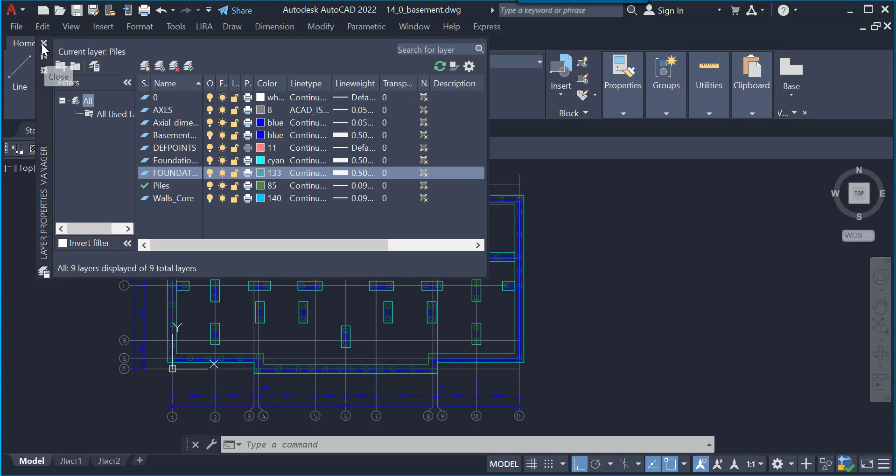Check that the layer AXES is indicated in capital letters. Also check the correct layer name, foundation_slab_openings. Close the dialog box. Now we proceed to the second stage of inputting the properties of objects using the floor plan import components built into AutoCAD.

Click on the built-in panel LIRA. Select Create Layer, then Walls. The Walls layer is automatically set as the current layer. Select the Polyline command and move the cursor to the doorway in the stiffness core located along the D-axis. Move the cursor to the middle of the left edge of the opening and start building the polyline from here to the left. Enter 575 mm.

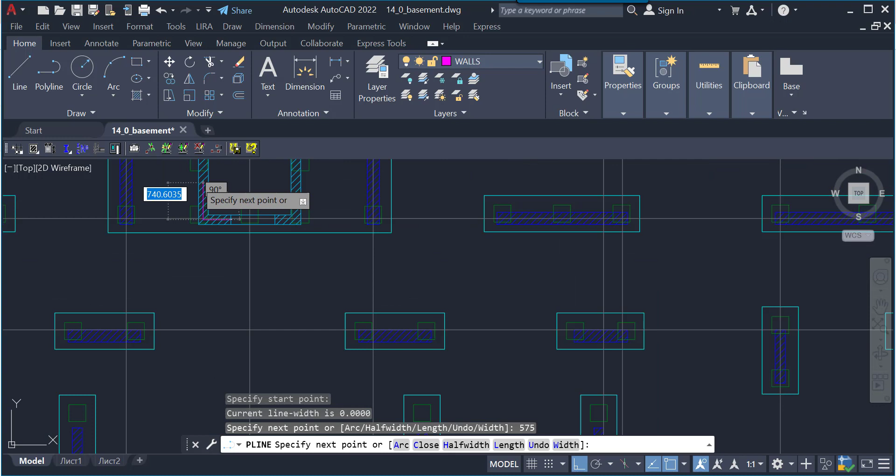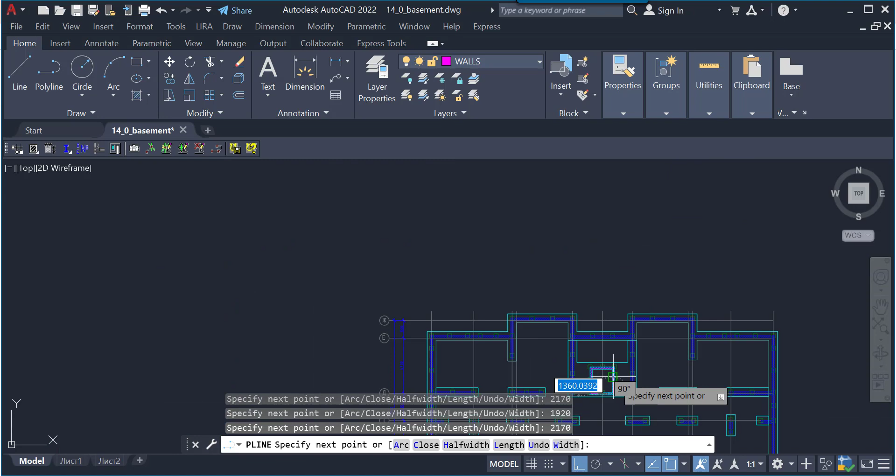Click Enter. Then change the direction up and enter 2170 mm. Click Enter. Change the direction to the right and enter 1920 mm. Click Enter. And change the direction down, enter 2170 mm. Click Enter and close the polyline by pressing Enter. Select the newly created polyline and click on the point at the beginning of the doorway and move it to the corner of the wall.

Click on the built-in panel LIRA. Select Layer Properties and Wall or Slab Thickness. Press Enter to confirm that the following layers of walls will be modified. Enter a core wall thickness of 200 mm and press Enter. The following layers will be modified. The postfix WALLS(H-200) will appear.

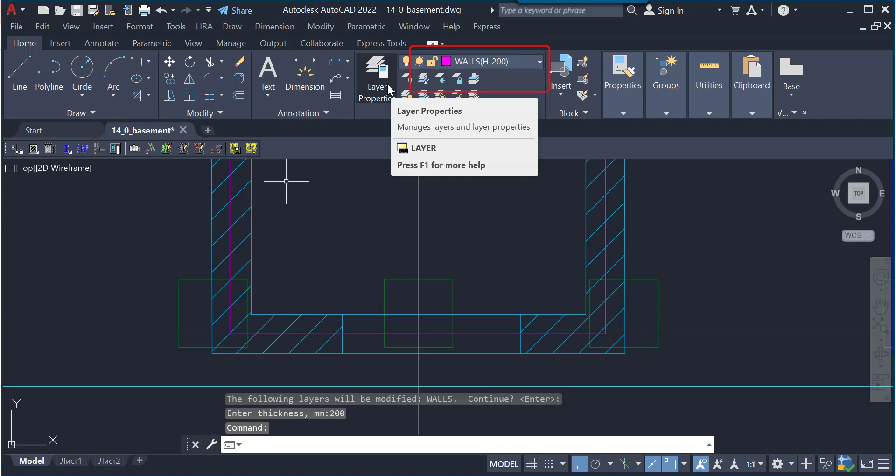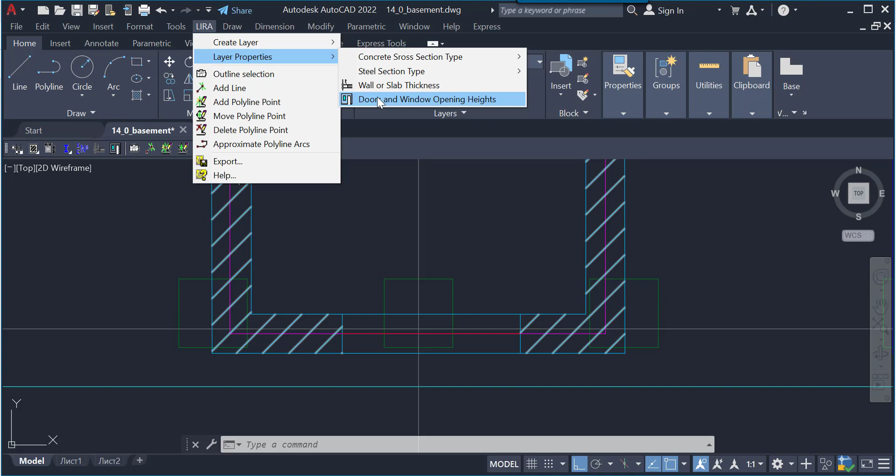Click on the built-in LIRA panel, select Create Layer and Door Openings. Select the Line command and create a line according to the dimensions of the opening. Click on the built-in panel LIRA, select Layer Properties and Door and Window Opening Heights. Select the newly created line and press Enter. Press Enter again to confirm the changes in the following layers.

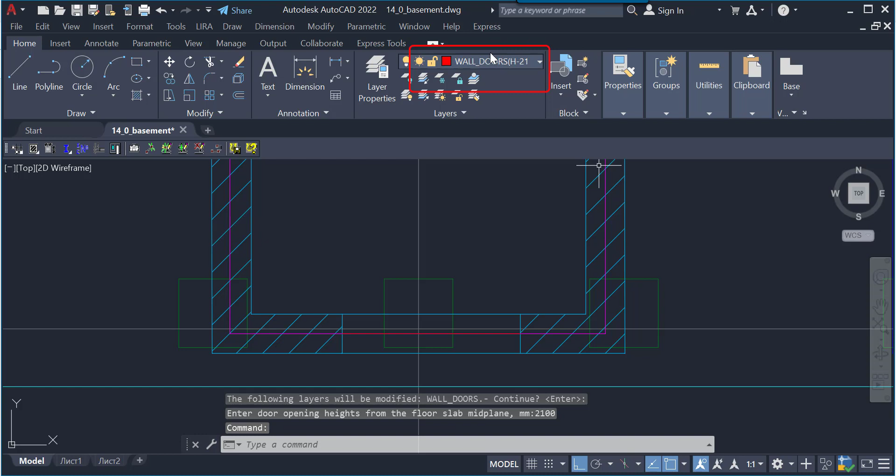Enter door opening height from the floor slab midplane 2100 mm and click Enter. The name H2100 will appear. Select the polyline command and select the piles layer from the drop-down list of layers. Check that these buttons and endpoint are switched on. We proceed to the third stage of entering the properties of objects along the contour.

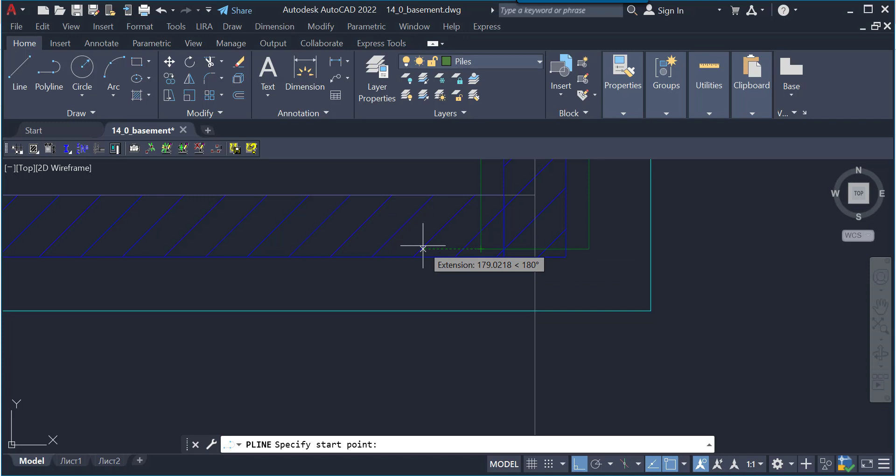Bind the cursor to the pile located at the intersection of axes B and 11. Enter the offset value of 1150 mm to the left and press Enter. Change the direction up and specify the value 350 mm. Then 350 mm to the left, 350 mm down. Close the polyline and click Enter.

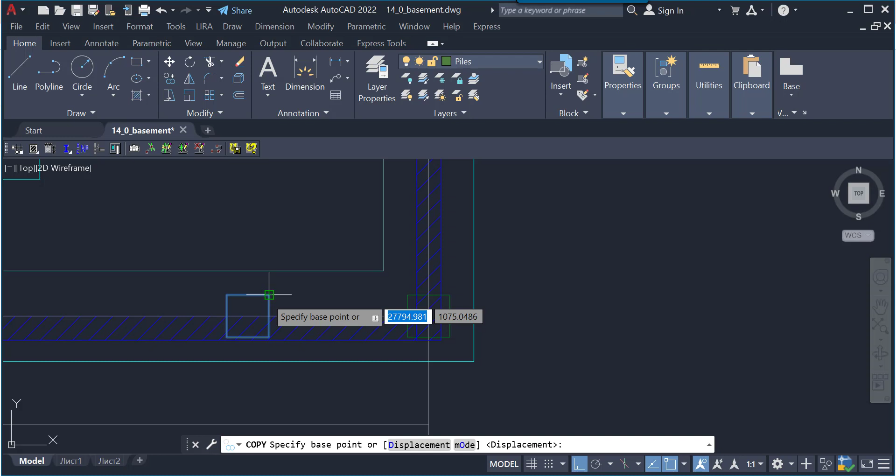Select the newly created pile, select the Copy command and specify the right point of the pile at the snap. Set the offset direction to the left, 1540 mm. Then 2590 mm and 4150 mm and click Escape. Open the Save Drawing dialog box and click Save.

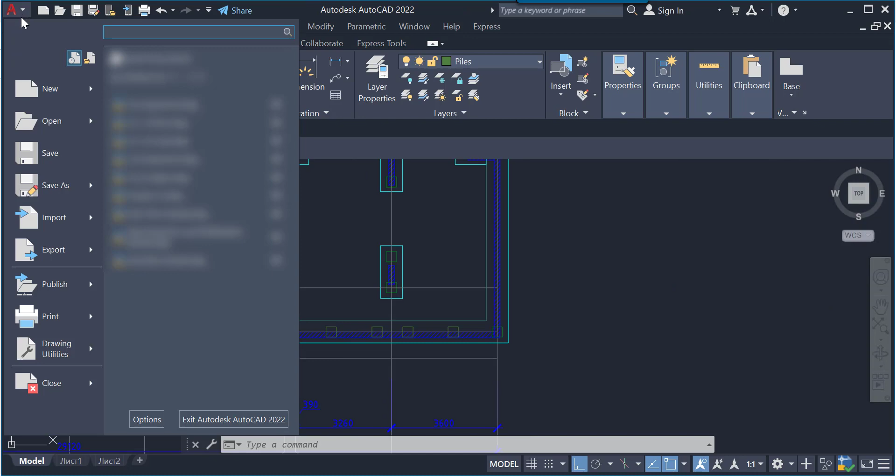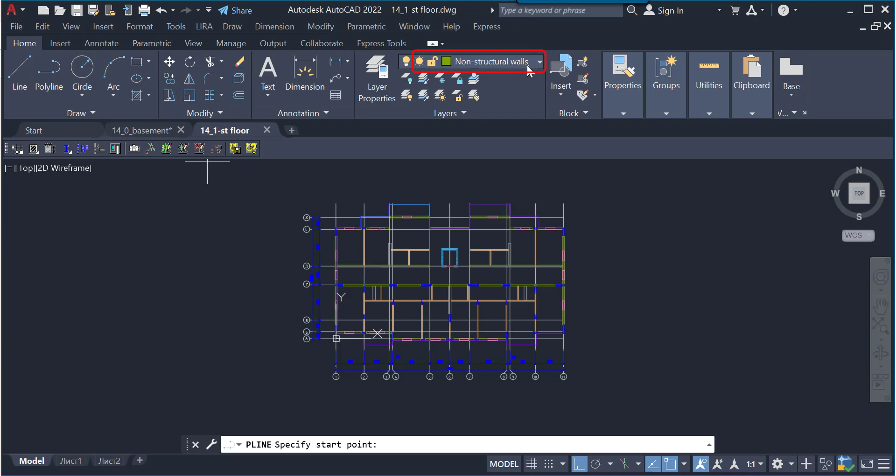Click File, Open. Select Local Disk C, then Users, Public Documents, LIRA-SAPFIR 2022, Manual, Folder In, Folder 14, and File 14 First Floor. Select the polyline command and select Non-Structural Walls 250.

Bind the cursor to the lower left corner of the pylon located at the intersection of the 10B axis and left mouse click. Move the crosshairs to the left and enter value 3230. Press Enter. Change the direction up. Enter 250 mm. Press Enter and enter 3230 to the right. Press Enter. Close the polyline. Select the polyline command again.

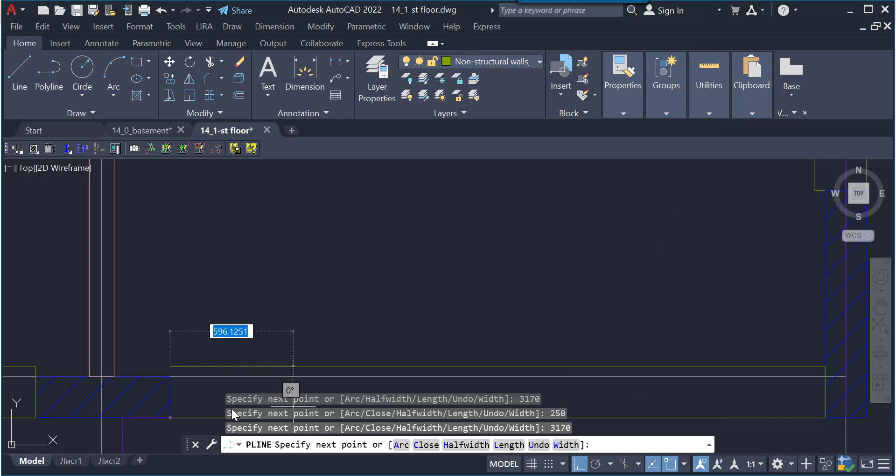Bind the cursor to the lower right point of the pylon located at the intersection of axis 10B and click the left mouse button. Start moving the crosshairs to the right. Enter value 3170 mm. Click Enter. Change the direction up and enter 250 mm. Click Enter. Enter 3170 mm to the left and close the polyline.

Select the command Polyline. Select layer Windows Outline. Bind the cursor to the middle of the bottom edge of the wall along axis B, which starts from axis 8. Click the left mouse button. Move the crosshair to the right. Enter the value 1200 mm. Click Enter. Change the direction up, enter the value 250 mm and click Enter. Change the direction to the left, enter 1200 mm and close the polyline.

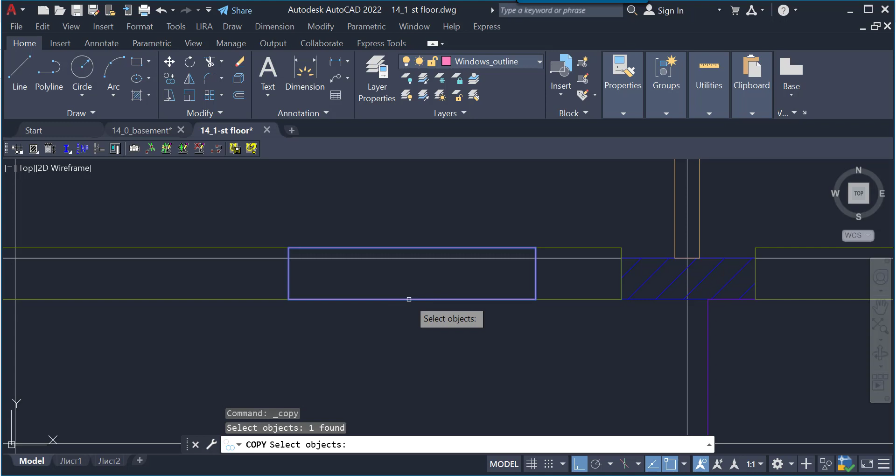Select the Copy command. Specify the middle of the bottom edge of the window opening as a base snap point and indicate the middle of the wall along the B-axis between axis 10, 11 as a second point. Press Escape.

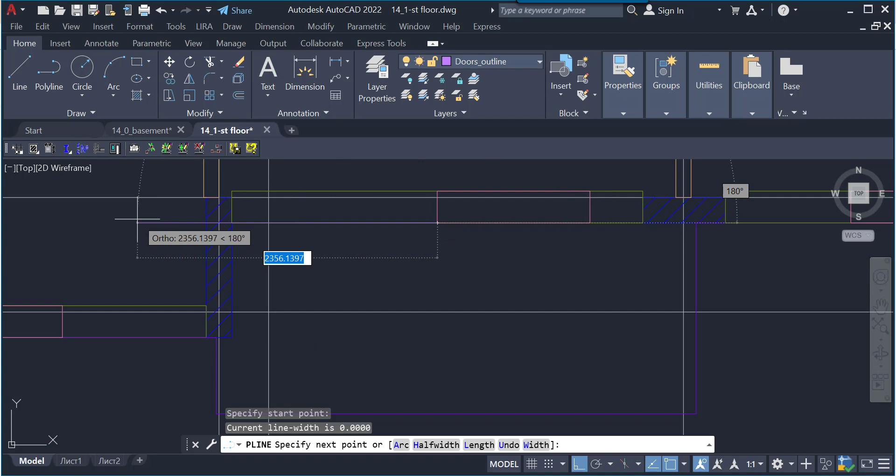Select the Polyline command and select the door's outline layer. Bind the cursor to the lower left corner of the window along the B-axis between axis 9, 10 and click the left mouse button. Start moving the crosshairs to the left. Enter the value 700, press Enter. Change the direction up, enter the value 250, click Enter. Build in the same way to the right 700 mm and close the polyline.

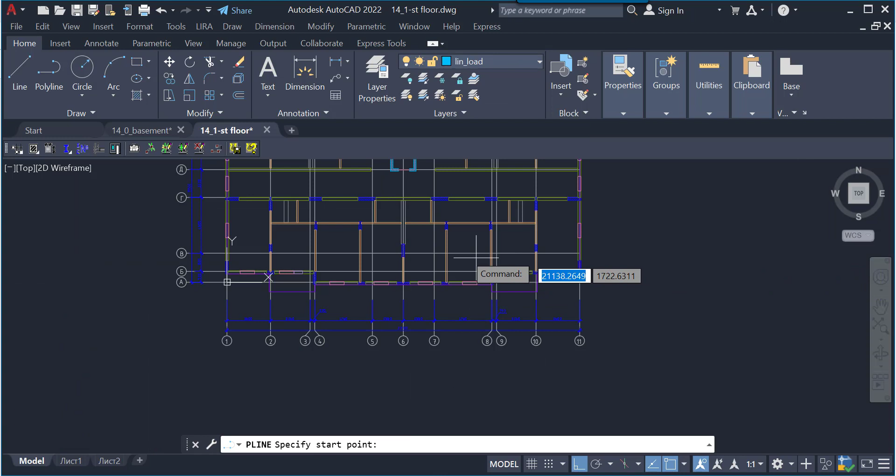Select the command Polyline and the layer Linear Load. Bind to the intersection point of the slab and the pylon near the intersection of the B2 axis and enter the value to the right 60 mm. Click Enter. Indicate the direction down, enter 1440 mm. Click Enter. Change the direction to the right 3650 mm and up 540 mm.

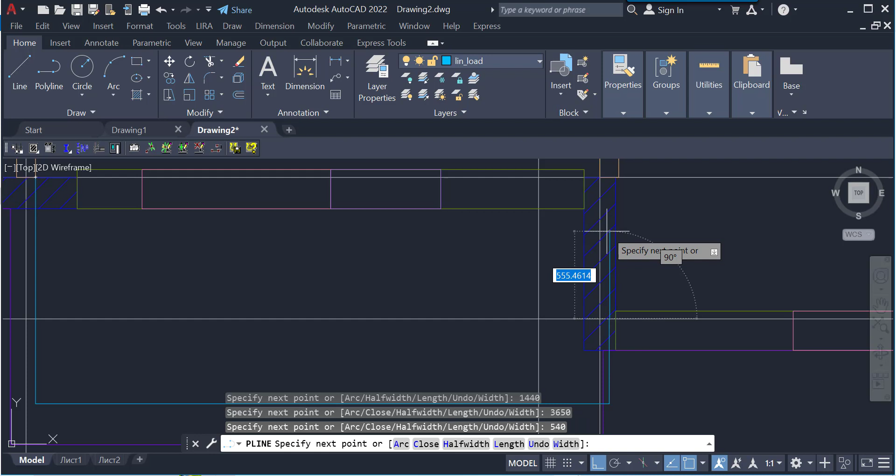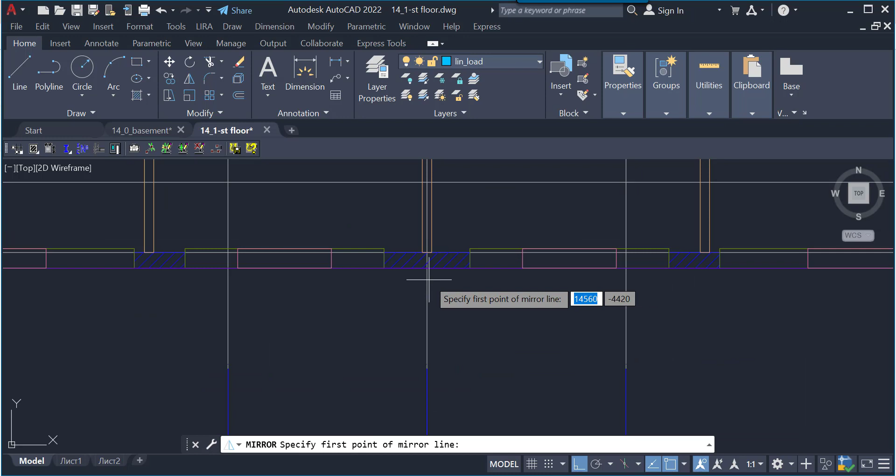Click Enter. Click Tools and open Quick Select. In the Properties, select the polyline object type. In the Properties block, specify the layer. In the Value list, select the layer Linear Load. Click OK. Select the command Mirror and indicate 2 points on axis 6 to set the axis of symmetry. Now the software asks you to erase source objects. Answer no. Click Enter. Click File and save the drawing.

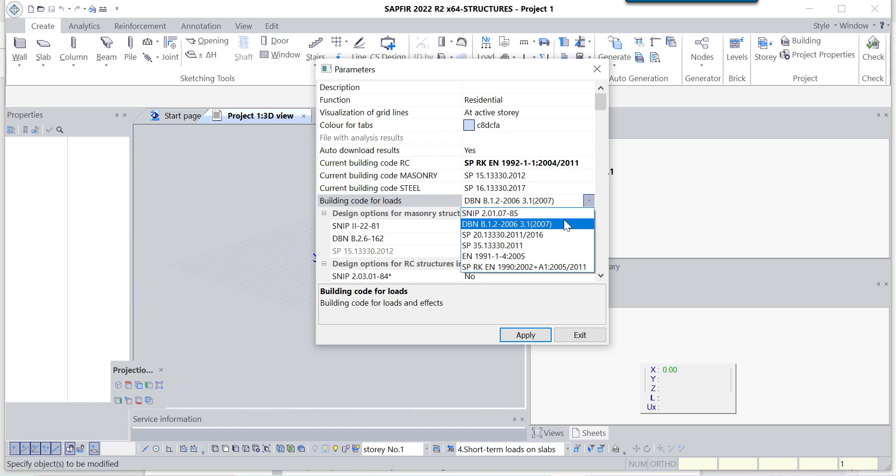Open Sapfir. Click Create Project. Click Project Properties. Change the current building norms to your code. If you can't find the necessary norms, scroll down to Design Options for Reinforced Concrete Structures and find SP RK and click Yes. Then click Apply. Now change the current building code for reinforced concrete and loads in Edit Norm. Click Apply and exit. Open the Import Floor Plans dialog box.

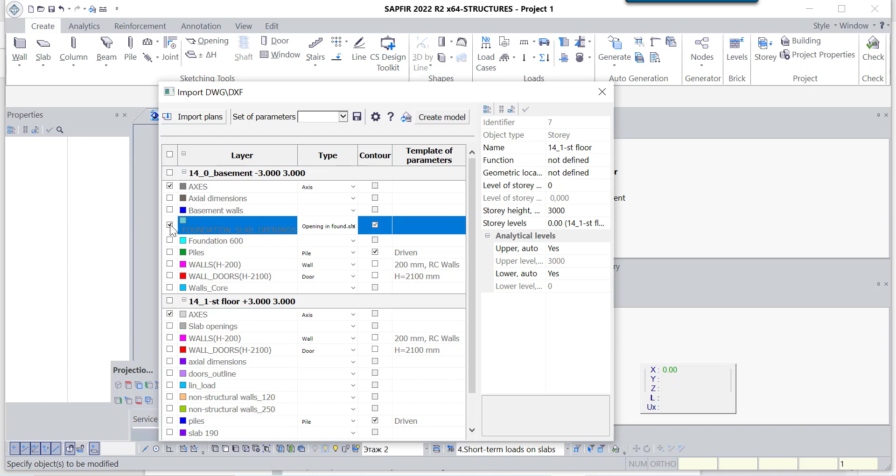Select the basement and first floor files. Open them. Click on the name of the floor 14-0 basement and specify the bottom level of the floor minus 3000 mm. Apply the properties or click OK. The level of the bottom of the floor should be 0. Press Enter. Check the boxes next to the layers Axes, Foundation Slab Openings, Walls H200 and Wall Doors H2100. Click the Piles layer.

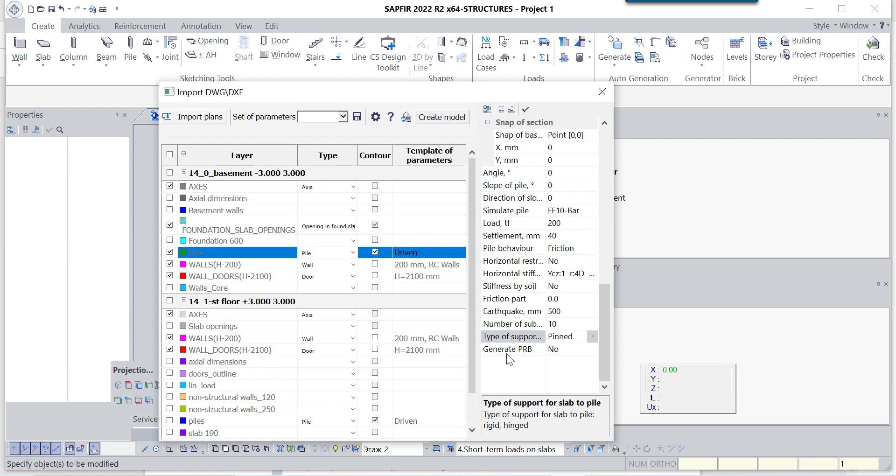Select the type Pile. In the Properties, find Type of Support and click Pinned. Click Enter. Select layer Basement Walls and select type Wall. Select the layer Foundation 600, select the type Foundation Slab and click Contour. In the Properties, select Restraints. Click on 3 dots and select XY. Click OK. Select the layer Doors Outline. Select the type Door. Click Contour.

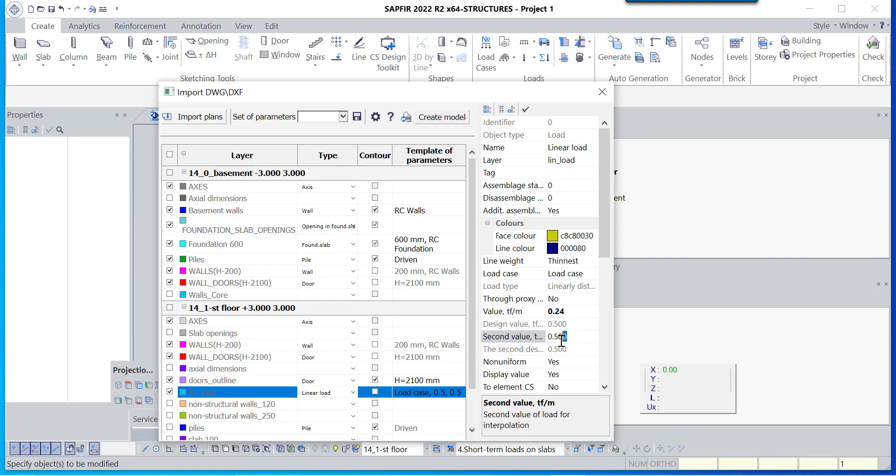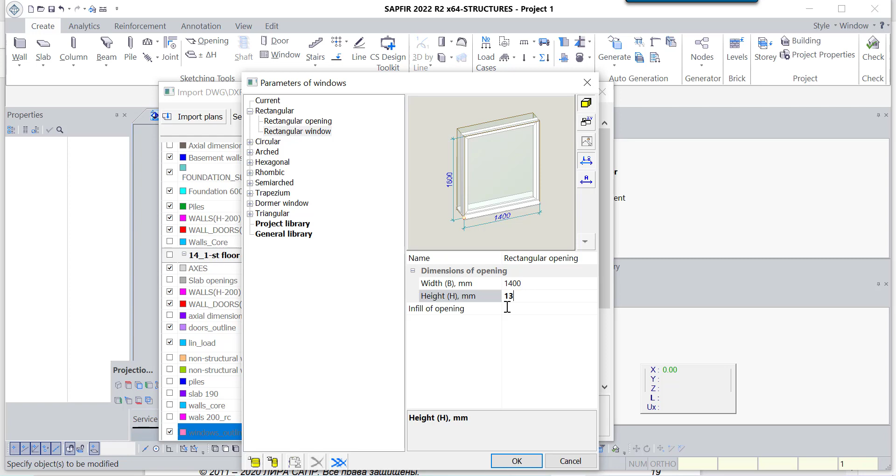Select the layer Line Load. Select the type Linear Load. In the parameters, find value and enter 0.24. The second value is the same. Click Enter. Select the layer Windows Outline. Select the type Window. In the parameters, find parameters of opening and click 3 dots. Change the height. Enter 1300 mm. Click OK and Enter. Select Slab Openings. Select the type Opening in Slab.

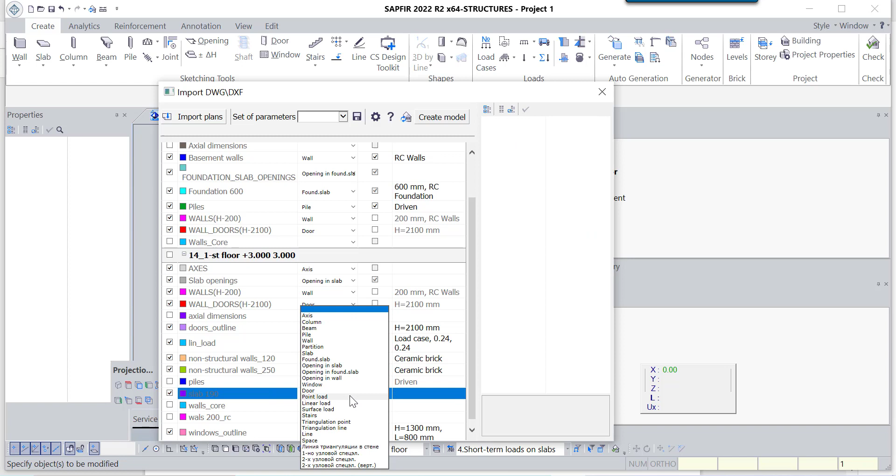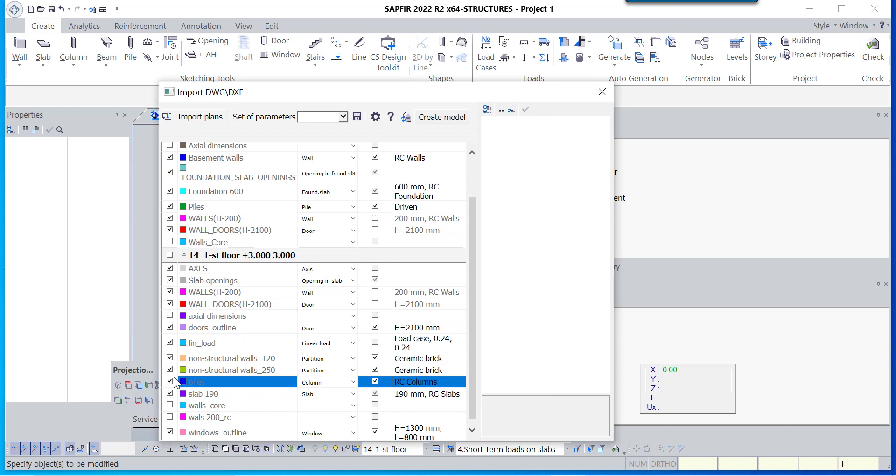Press Shift and hold the button, and click layers Non-Structural Walls 120 and Non-Structural Walls 250. Select the type Partition. Select the layer Slab 190. Select the type Slab. In the Properties, find Thickness and change to 190. Scroll down and enter Dead Load 0.2 and Short Term Load 0.1. Click Enter. Select the layer Piles and select the type Column. Select the layer Walls 200 Reinforced Concrete. Select the type Wall. Click Create Model.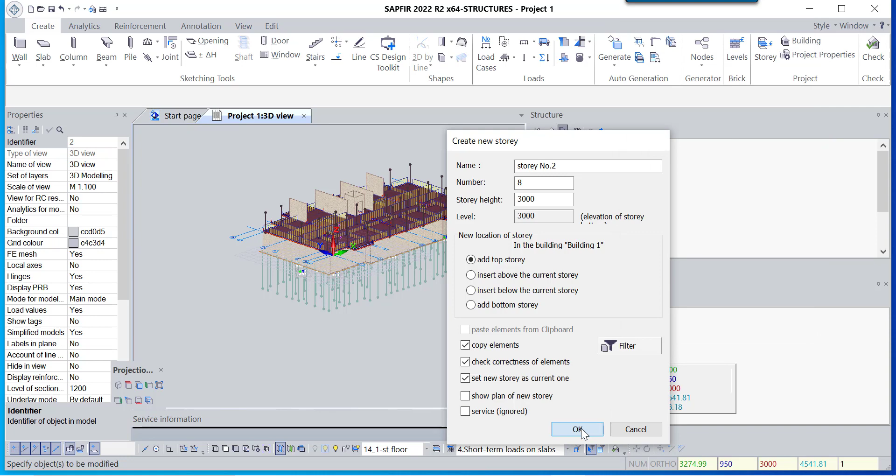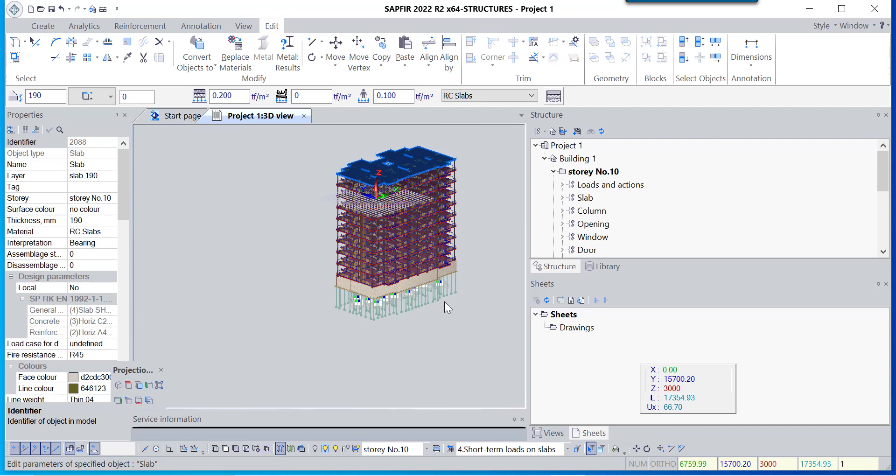Click on the button Analytical Model. Click New Story. Change the name Story Number 2. Number of stories 8. Click Copy Elements and click Filter. Uncheck the box. Click OK. In the Structure of Stories, select Slab of last story. In the Edit box, click Copy. Then click Paste. Click from Story top. Click Equidistant Relocation. Enter 3000. Click OK. Click Escape and click Front View.

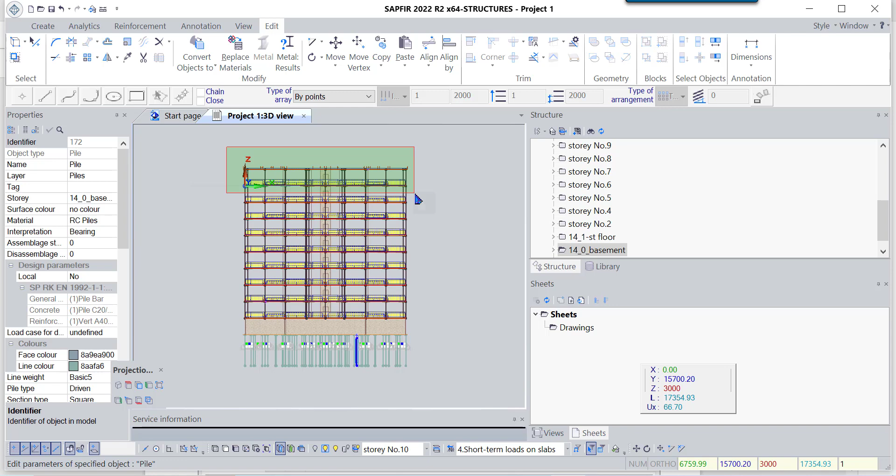Open Filter for Selection Objects. Click minus and click Opening. Click OK. Select the top floor slab from left to the right. Click Delete. Open one more time Filter for Selection Objects. Click double plus and click OK.

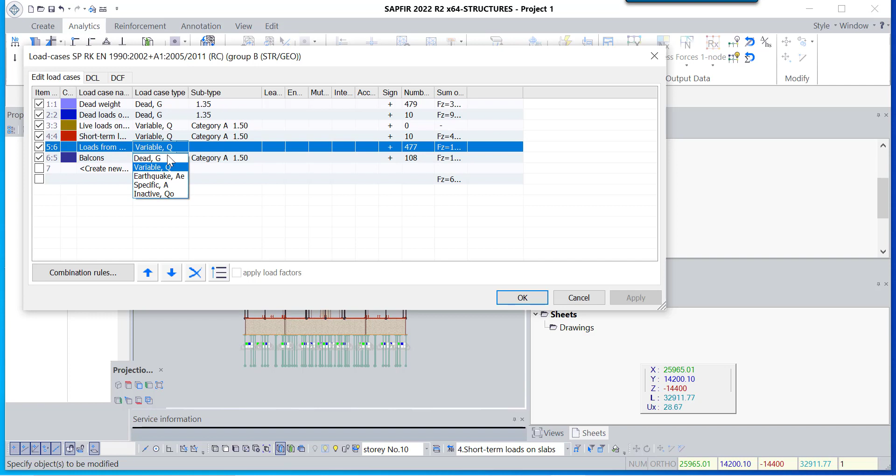Open command Load Cases. Select Loads from Walls and click Move Down. Select Load Case and enter the name Balconies. Change the load case types for loads from wall and balconies. Select Dead Load. Click Design Combination Loads and let it generate. Click OK. Open Meshed Model and click OK. During the check, the program may issue warnings. These places need to be reviewed. If there are errors in the model, correct them.

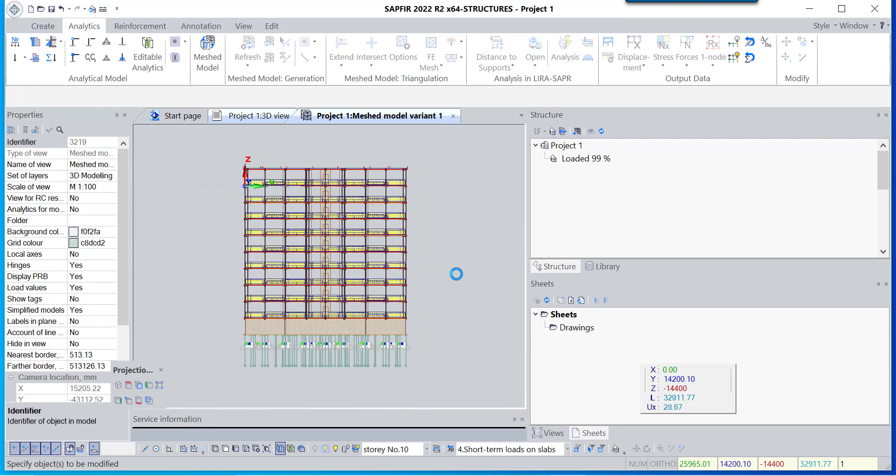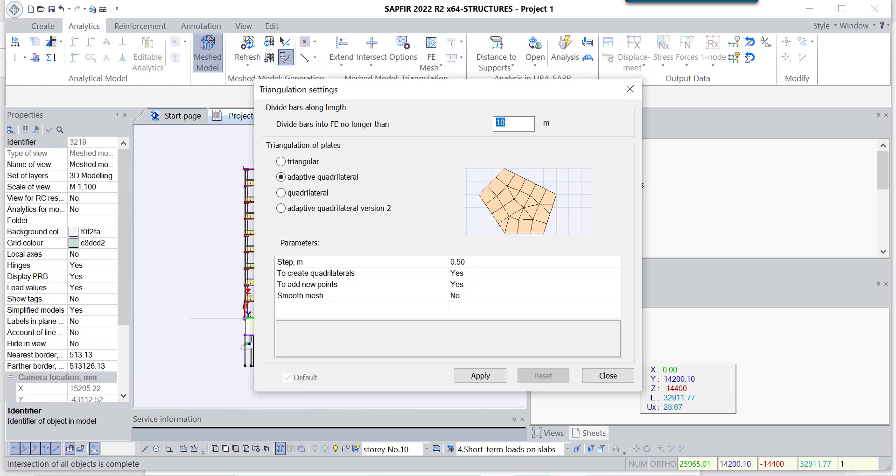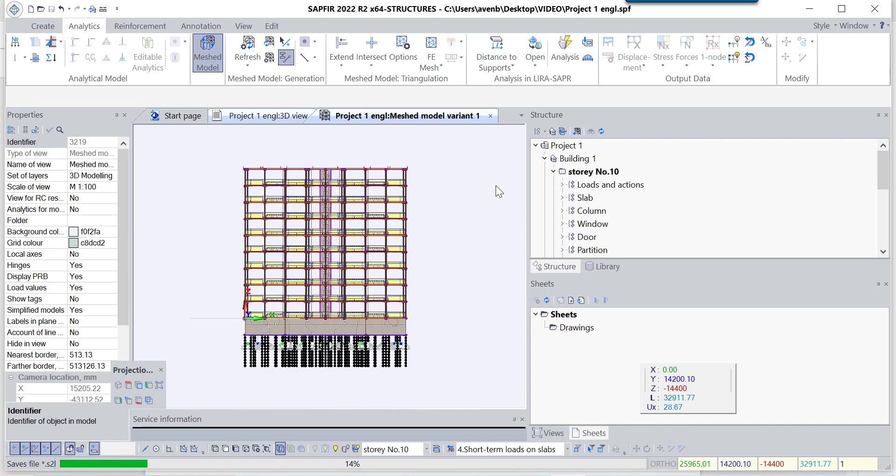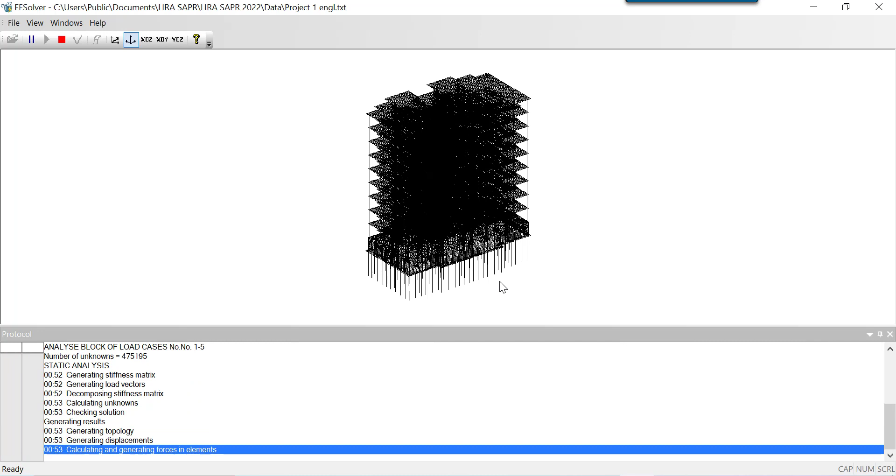Open the parameters of meshed model and enter union 5 mm. Check settings for intersections, axial lines, not exact. Open command intersect. Click yes. Open the command options and enter step of triangulation 0.25. Click apply. Open the command finite element mesh. Confirm yes. Save the project. Open LIRA-SAPR. Click Analysis. Now, on the Analysis tab, we analyze the results of static and dynamic calculations.